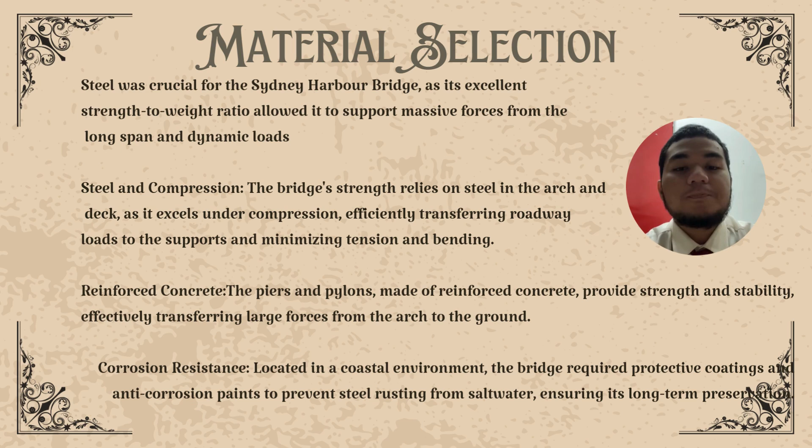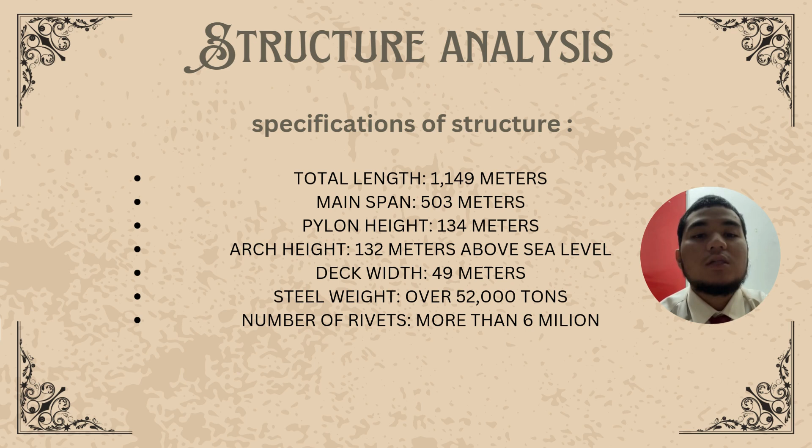So, this is the structural analysis. Specification structures of the Sydney Harbour Bridge. Length of the bridge was 1,149 meters. Main span 503 meters. Pylon height 134 meters. Arch height 132 meters above sea level. Deck width 49 meters. Steel weight over 52,000 tons. Number of rivets more than 6 million.

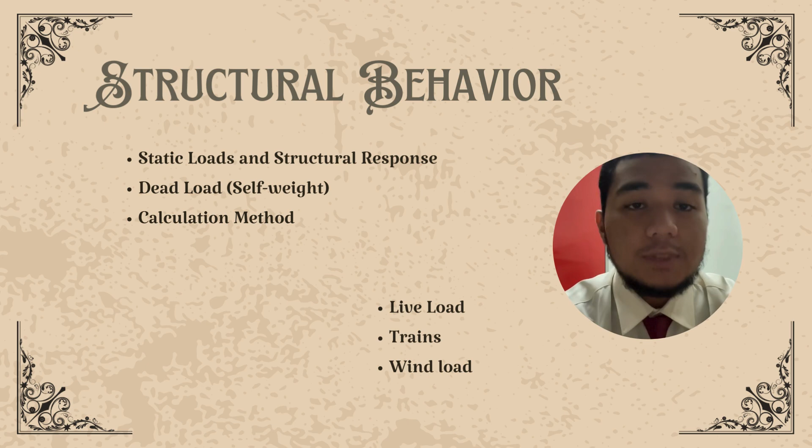Next, for structural behavior, we got static loads and structural response: dead load, self weight, calculation method, live load, trains, and lastly, wind load. So next, as we can see, there is the methodology of this project. The main design idea was the parabolic arch, chosen to effectively carry the compression forces. Early static design aimed to minimize bending and shear forces to keep the bridge stable. Early static studies, models such as Castigliano's theorem and Euler-Bernoulli beam theory, predicted the response of the bridge under various loads, considering forces along the arch from top to support, even in extreme conditions.

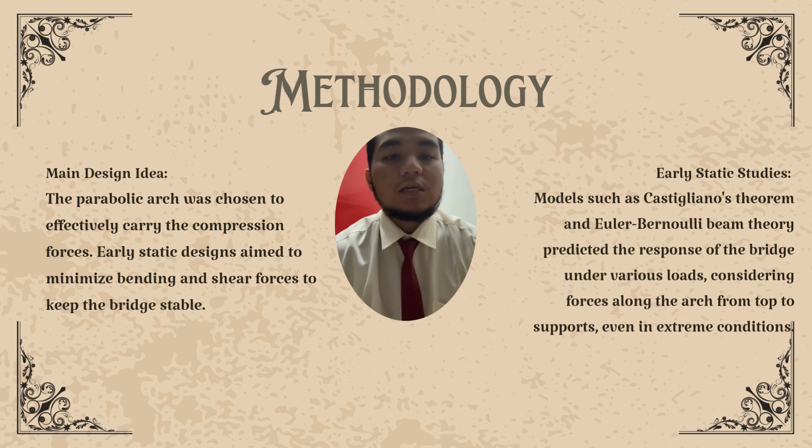Sydney Harbour Bridge Challenges and Solutions. The Sydney Harbour Bridge is an iconic landmark and a vital part of Sydney's infrastructure. It connects the city's central business district to the northern suburbs, supporting vehicles, trains, and pedestrians daily. However, it faces several challenges that must be addressed to ensure its long-term safety and functionality.

First, structural integrity and load capacity problems. Increasing traffic and heavy loads strain the bridge, which was originally designed for lighter use. The impact of that is material fatigue, cracks, and corrosion risk to the long-term stability of the bridge. Second, corrosion and material degradation problem. The salty environment causes corrosion of steel components, and the impact is weakening of the structure and potential failure of critical parts.

Number 3 is traffic congestion and capacity limits problem. The bridge often faces severe traffic congestion, especially at peak hours, and the impact is it causes delays, increased pollution, and inefficiency in Sydney's transportation network. Number 4 is aging infrastructure and maintenance. The problem is it was built in 1932. The bridge requires regular maintenance to prevent failures, and the impact is delayed repairs disrupt traffic, tourism,

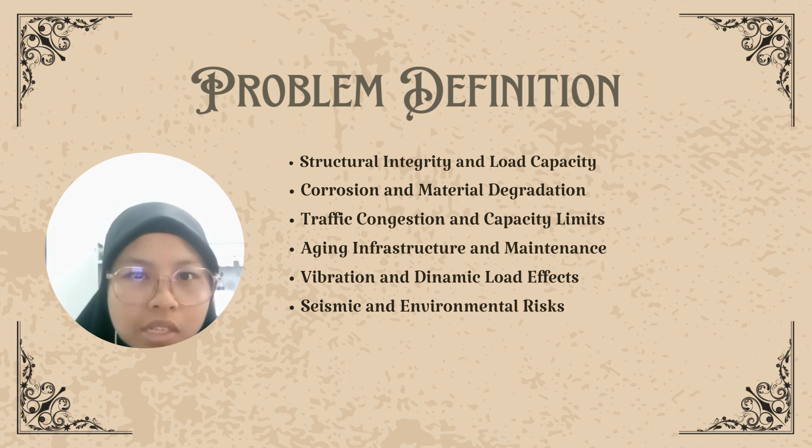In conclusion, the Sydney Harbour Bridge is an engineering marvel and a critical part of Sydney's economy and identity. It needs regular maintenance and monitoring, traffic management improvements, and investment in new technologies to strengthen the structure. By addressing these challenges, we can preserve this landmark for future generations.

The Harbour Bridge is a complex structure with several interacting components, including its arch, deck, supports, and foundations. In engineering, the behavior of such a bridge can be analyzed using various mathematical models to describe the forces acting on it, its structural deformation, and overall stability.

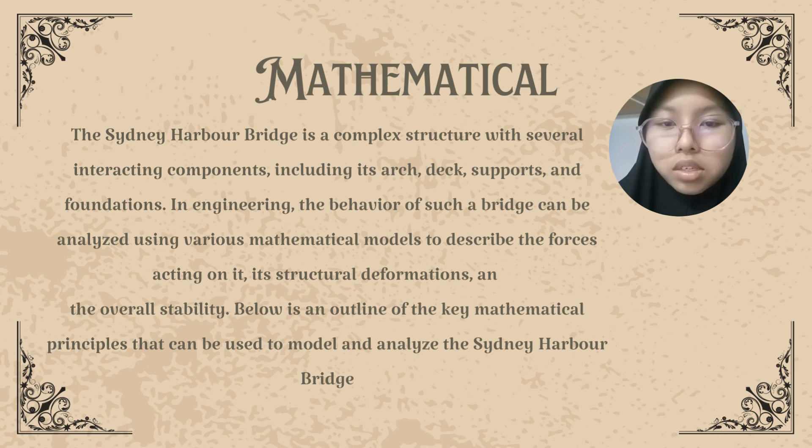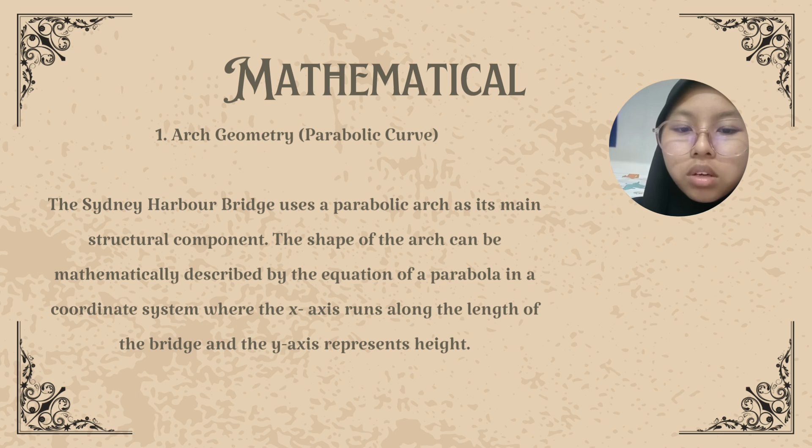Geometry: parabolic curve. The Sydney Harbour Bridge uses the parabolic arch as its main structural component. The shape of the arch can be mathematically described by the equation of a parabola in a coordinate system where the x-axis runs along the length of the bridge and the y-axis represents height.

The general equation of a parabola is y = ax² + bx + c, where y is the vertical position of points on the arch, x is the position along the length of the arch, and a, b, and c are constants determined based on the geometry of the bridge.

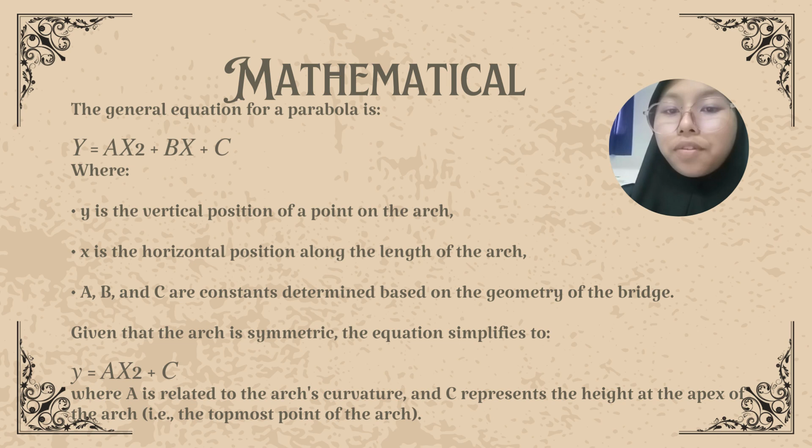Given that the arch is symmetric, the equation simplifies to y = ax² + c, where a is related to the arch's curvature and c represents the height of the apex of the arch, which is the topmost point of the arch.

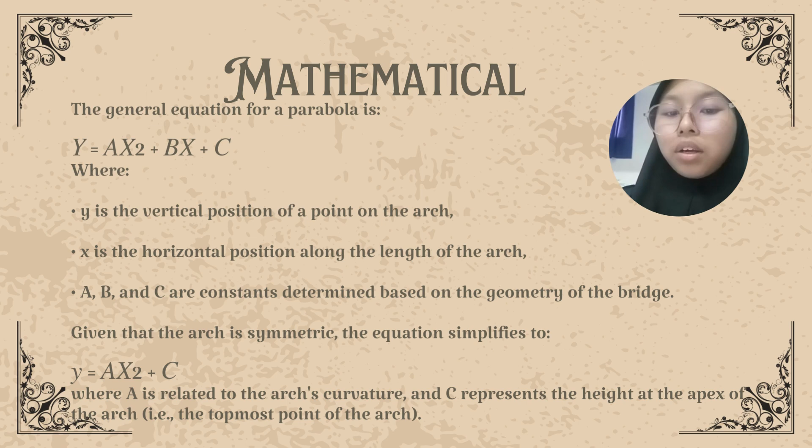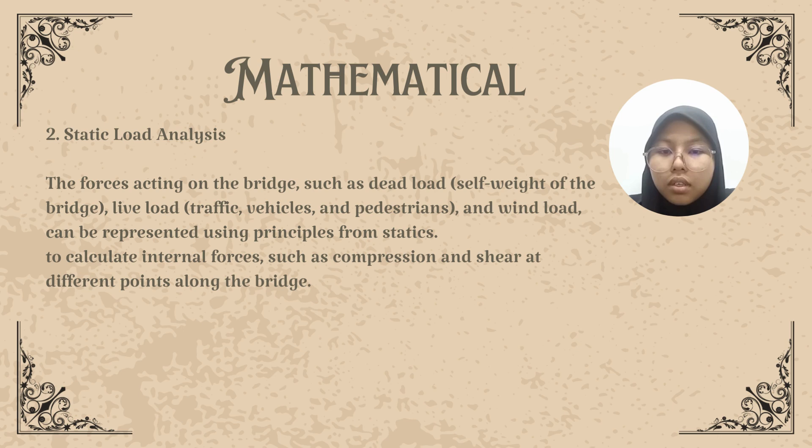Number 2 is static load analysis. The forces acting on the bridge, such as dead load, live load, and wind load, can be represented using principles of statics to calculate the internal forces such as compression and shear at different points along the bridge.

Dead load or self-weight. The total weight of the bridge is calculated by summing the contribution of each component: W total equals the summation of Wi. W total is the total weight of the bridge. Wi is the weight of components such as the steel arch, deck, piers, etc. The total force due to dead load can be used to calculate internal forces such as compression and shear at different points of the bridge.

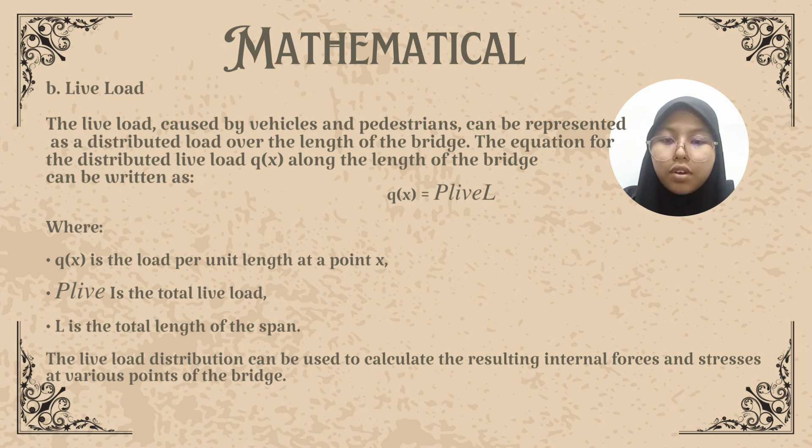Live load. The live load caused by vehicles and pedestrians can be represented as a distributed load over the length of the bridge. The distributed live load q(x) along the length of the bridge can be written as q(x) = P live / L, where q(x) is the load per unit length at point x, P live is the total live load, and L is the total length of the span. The live load distribution can be used to calculate the resulting internal forces and stresses at various points of the bridge.

Lastly is wind load. Wind load acting on the bridge is calculated using aeroelastic analysis. A simplified model assumes that wind generates a uniform force per unit area of the structure, which can be expressed by F wind equal to 2 times rho times CD times A times V.

F wind is the wind force, rho is the air density, typically 1.225 kilograms per cubic meter at sea level. CD is the drag coefficient depending on the shape of the bridge. A is the cross-sectional area of the bridge exposed to the wind. And lastly, V is the wind speed.

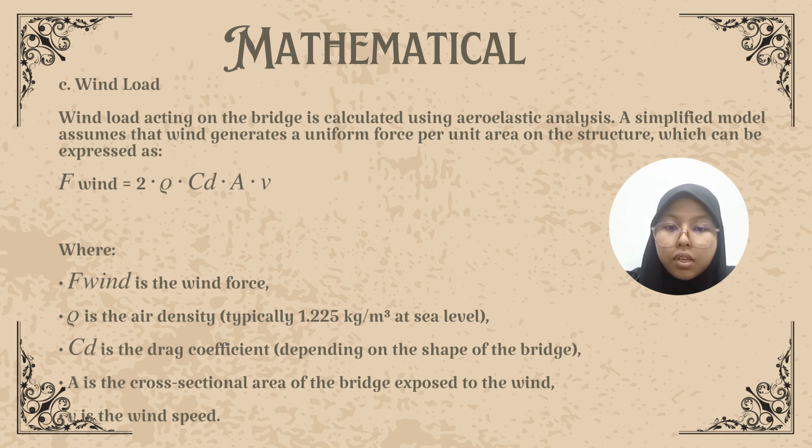So today I want to explain the result and discussion for our project, the Sydney Harbour Bridge. For the result, we have to divide this bridge into smaller sections, because this bridge is very big and long.

Because we have to analyze the forces acting on them, we use the method of sections to find the forces acting on the bridge. Second, we use trusses, cutting a part of a truss on the bridge. So we have a procedure to find the forces acting on them and cutting part of them.

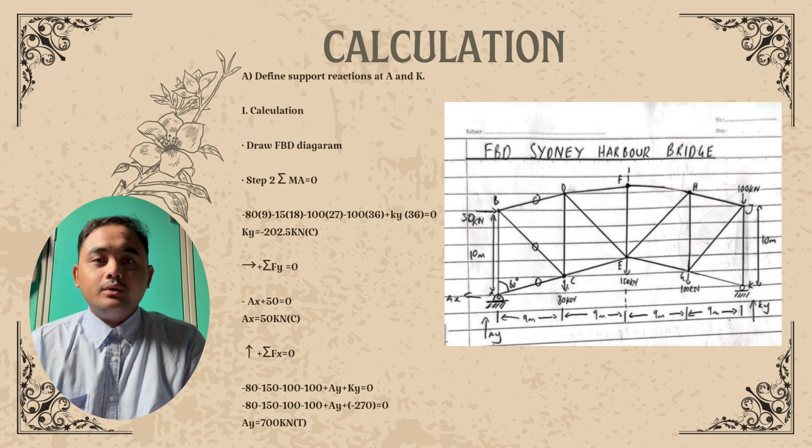For Fx, summation of Fx is equal to 0, and we find Ax for this case, because there is a force acting on the x-axis. So Ax is equal to 50 kilonewton, and that is compression. Summation of Fy equals 0, and we get Ay. So Ay is 700 kilonewton, and that is tension too.

Next, we move to the next section. We have to find the truss member, which part we cut. We decided to cut the part at points C and D. First, we do the same thing: we draw an FBD, so we can clearly find the force at the point we want to know. First we do a summation of moment at point C, so summation of moment at C equal to 0.

So we get the force at BD, FBD, which is 680 kilonewton, and it is tension. Second, we find FBC with summation of Fy equal to 0. So we get FBC equal to 1089 kilonewton, and it is tension.

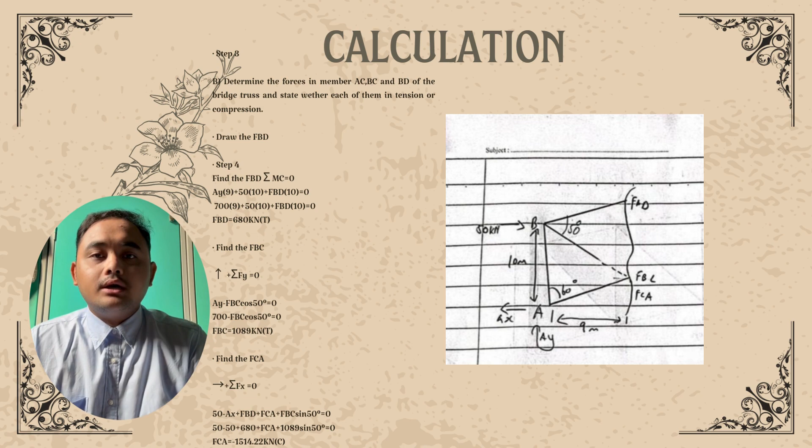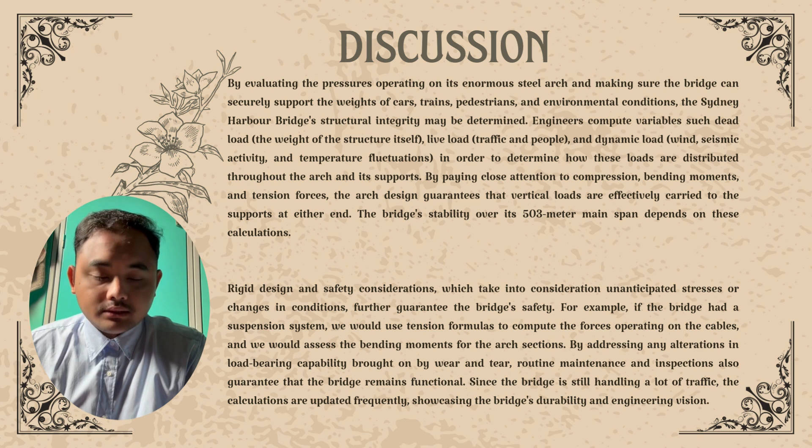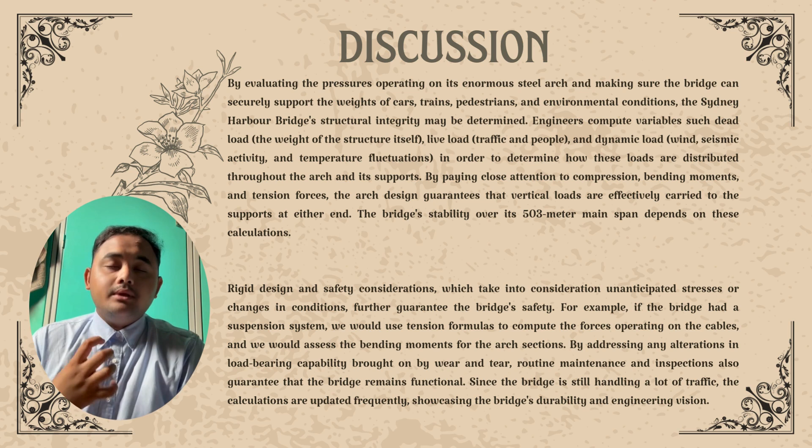For this discussion of the Sydney Harbour Bridge case, the bridge's integrity is assessed by calculating the live and dynamic loads, and ensuring the arch can safely carry traffic and environmental stress. The design focuses on compression, bending and tension forces for stability. Regular maintenance and updated calculations ensure its safety and durability in handling heavy traffic.

Conclusion: the Sydney Harbour Bridge is a great example of how we use the basics of mechanics to build something strong and safe. The big arch works by spreading the weight of the bridge, cars, and people to the strong ends called abutments. This balance of forces keeps the bridge steady and stops it from falling down. Engineers planned carefully to make sure the bridge could handle heavy loads, strong winds, and even changes in temperature. They used strong steel and smart design to make it last for many years.

In simple terms, the Sydney Harbour Bridge shows how understanding and using the basics of balance and strength can create something that's not just useful but also amazing to look at. It's a bridge that works and lasts because the forces on it are perfectly balanced.